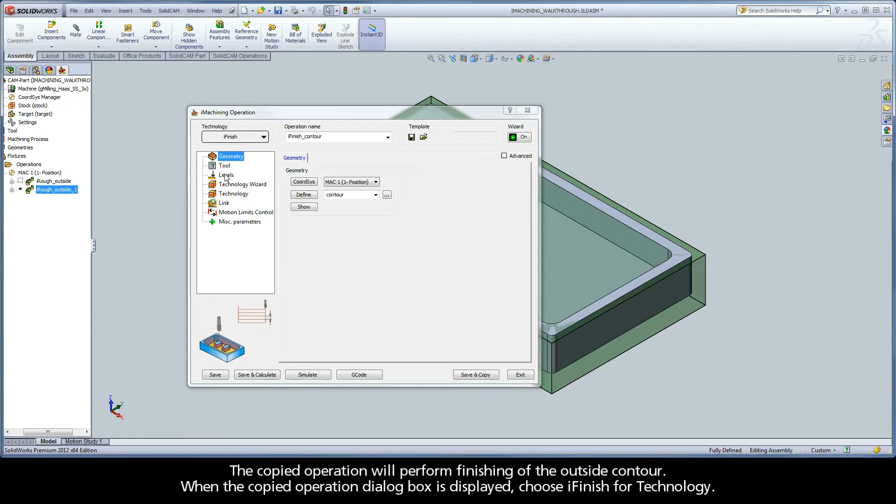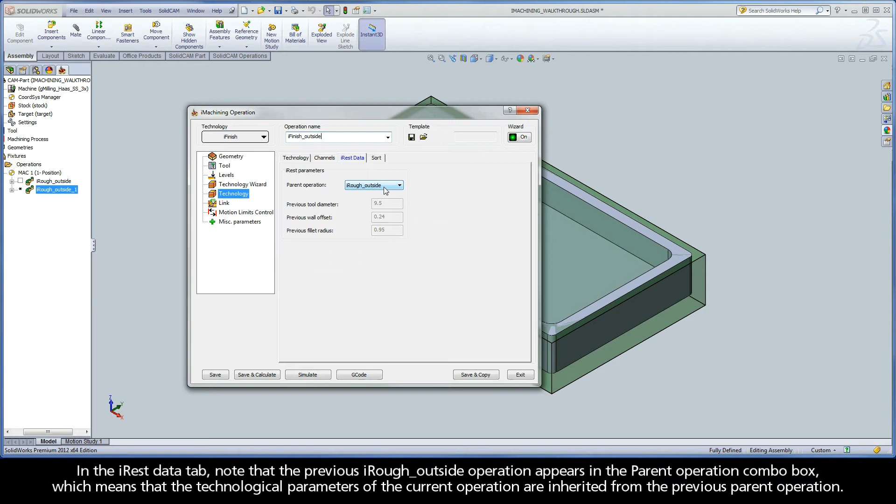Now, let's switch to the Technology branch. In the iRest Data tab, note that the previous iRough outside operation appears in the Parent Operation combo box, which means that the technological parameters of the current operation are inherited from the previous parent operation. Save and calculate, then simulate the operation in the Solid Verify mode. The finishing is performed in a single cutting pass.

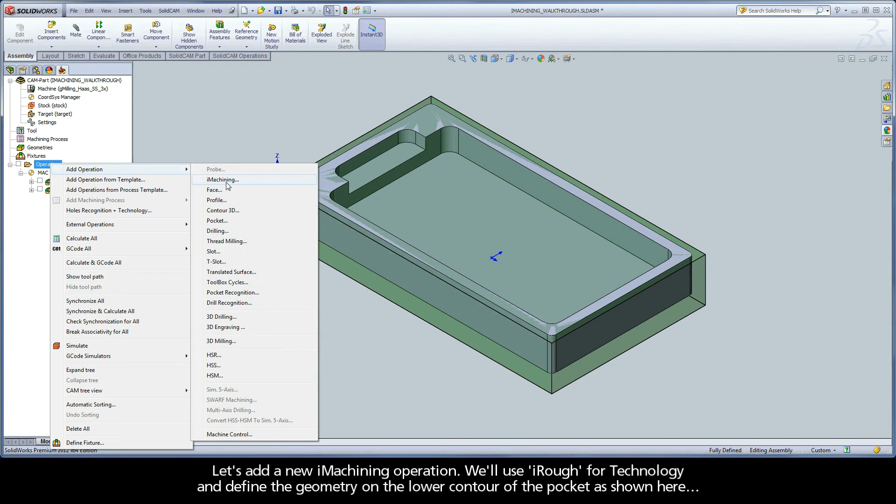Next, we will define the rough and finish machining of the center pocket. Let's add a new iMachining operation. We'll use iRough for Technology and define the geometry on the lower contour of the pocket as shown here. Pick the bottom face of the pocket for the machining depth.

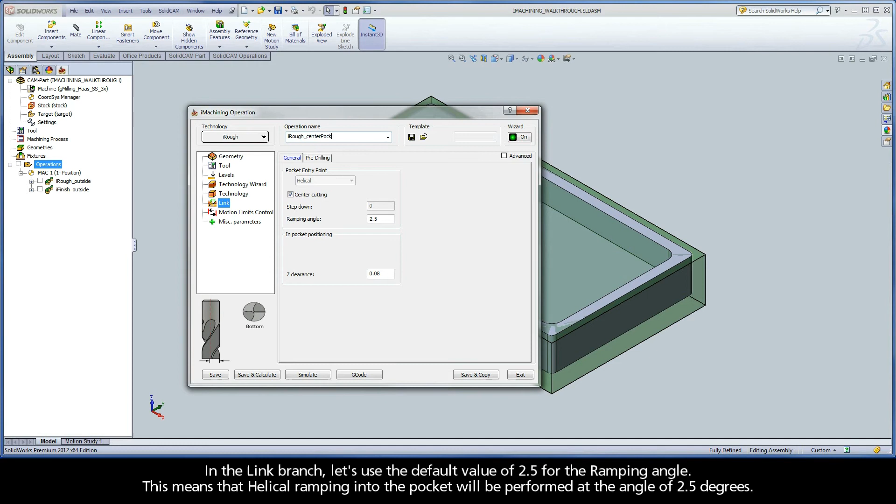We will select the same end mill tool defined in the previous operation, and we'll also use the default Technology Wizard settings. In the link branch, let's use the default value of 2.5 for the ramping angle. This means that the helical ramping into the pocket will be performed at the angle of 2.5 degrees.

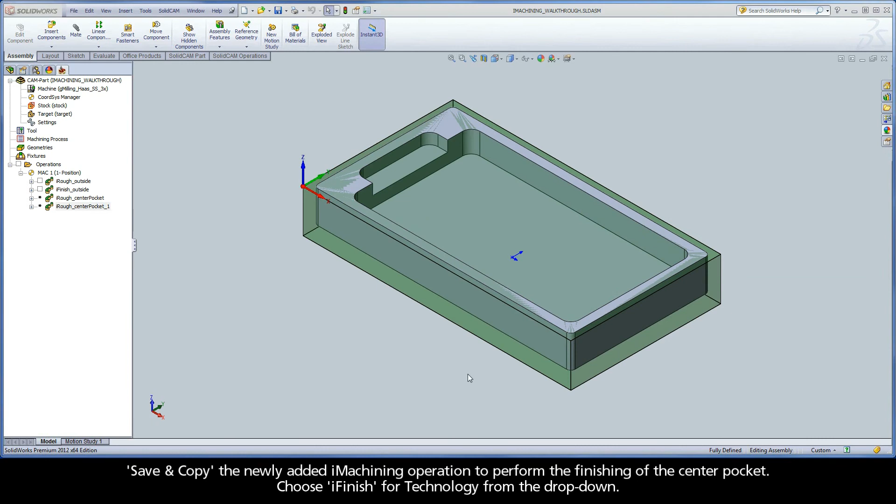Save and calculate the operation. Let's simulate it in the Solid Verify mode. We see that the tool performs the helical entry and then the pocket roughing toolpath. Save and copy the newly added iMachining operation to perform the finishing of the center pocket. Choose iFinish for Technology from the drop-down.

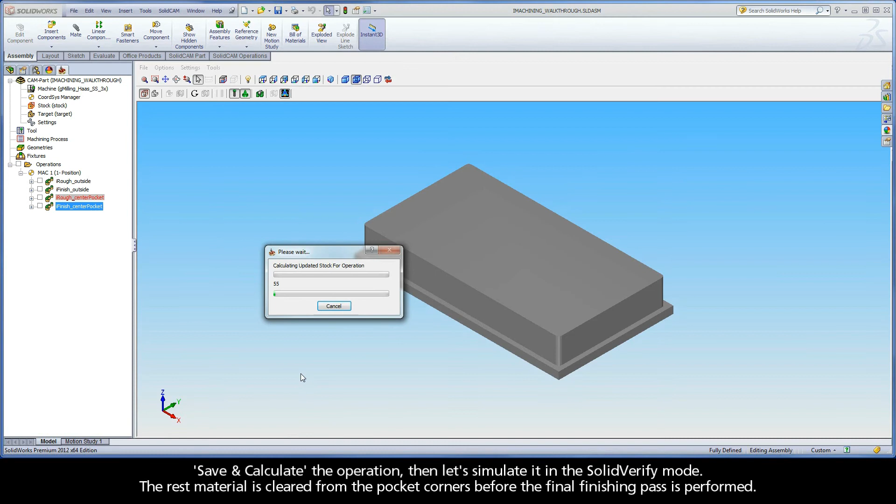Under the iRest Data tab in the Technology branch, the previous iRough center pocket operation appears as the parent operation. Save and calculate the operation, then let's simulate it in the Solid Verify mode. The rest material is cleared from the pocket corners before the final finishing pass is performed.

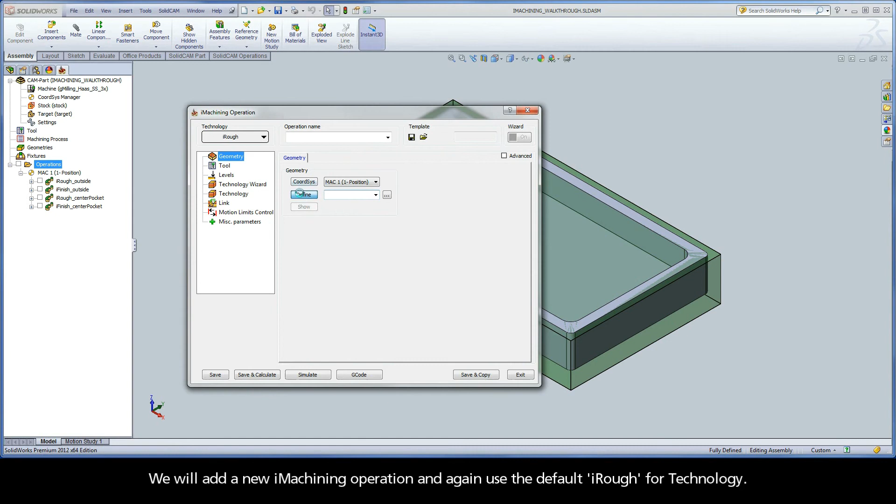Lastly, let's define the rough and finish machining of the pocket ledge. We will add a new iMachining operation and again use the default iRough for Technology. Let's define the geometry as a closed chain on the lower contour of the ledge, and then mark the selected edge being open as shown here. Pick the bottom face of the ledge for the machining depth definition.

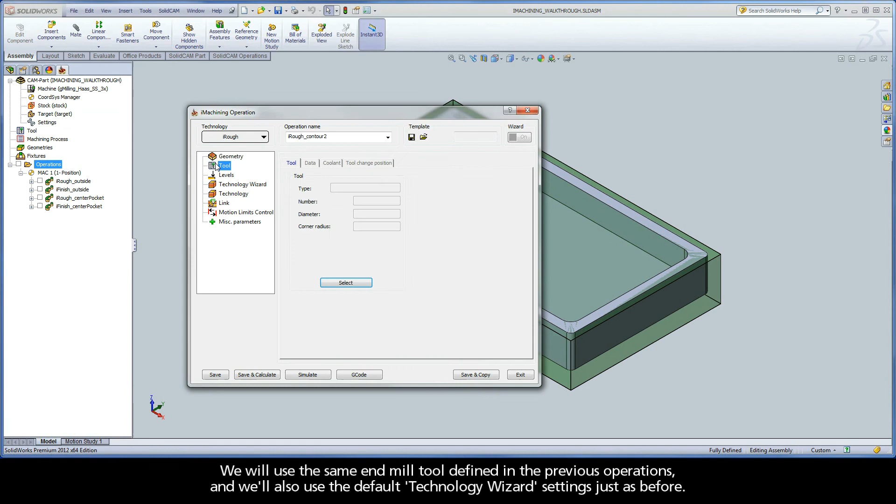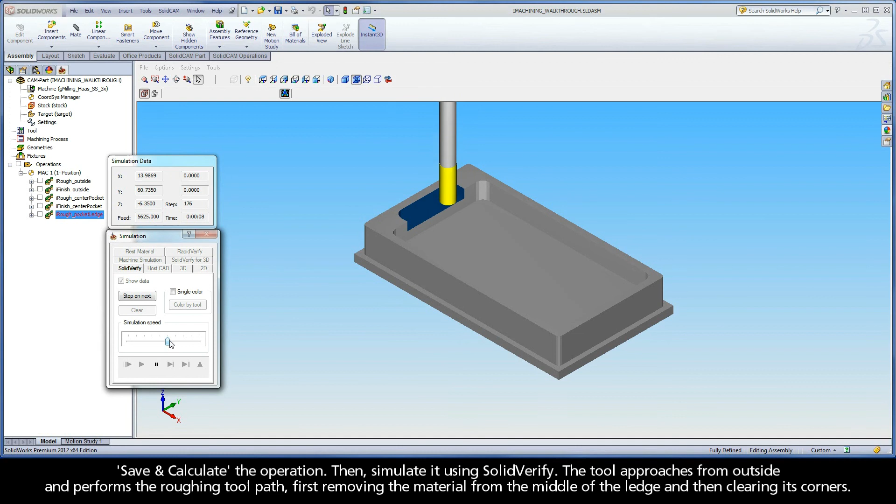We will use the same end mill tool defined in the previous operations, and we'll also use the default Technology Wizard settings just as before. Save and calculate the operation, then simulate it using SolidVerify. The tool approaches from the outside and performs the roughing toolpath, first removing the material from the middle of the ledge and then clearing its corners.

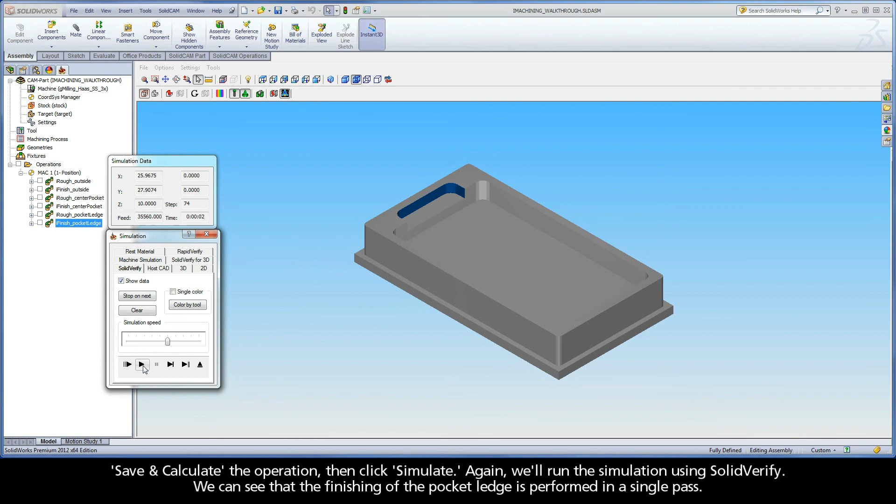Next, save and copy the operation to perform the finishing of the pocket ledge. We'll choose iFinish for Technology. Save and calculate the operation, then click Simulate. Again, we'll run the simulation using SolidVerify. We can see that the finishing of the pocket ledge is performed in a single pass.

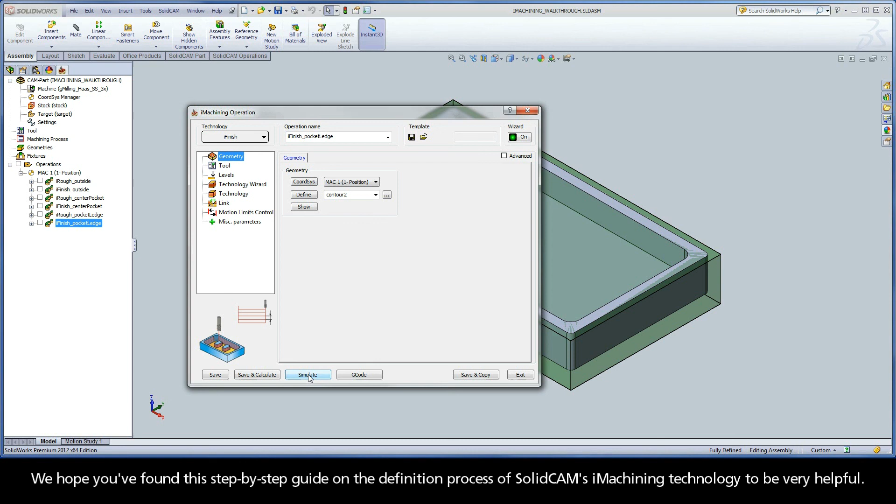Congratulations! You have successfully completed Exercise 1 of the iMachining Professor Jumpstart series, iMachining Walkthrough. We hope you found this step-by-step guide on the definition process of SolidCAM's iMachining technology to be very helpful.